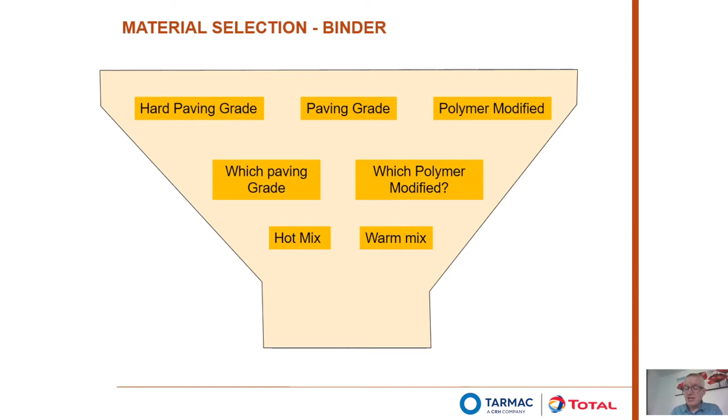Okay, now I want to focus very much on polymer modified bitumens because I see there's going to be an increasing use of polymer modified bitumen because of the real benefits that they can offer in terms of resistance to road stresses and the contribution it can make towards durability of the asphalt surface.

We can look at the impact in terms of the polymer modified bitumens and how stiff they are. Okay, whether they're very hard bitumens, i.e., very stiff, or whether they're very soft bitumens, i.e. they have low stiffness, but also in terms of the polymer impact, whether it's low polymer impact or high polymer impact. Now on this graph, I resisted putting low polymer concentration and high polymer concentration because it's never as straightforward as that.

Because it depends very much upon the bitumen source that you're using as to how influential that polymer content is going to be. It depends upon the type of polymer you use. It depends upon whether or not you cross-link those polymers. So rather than saying polymer content, I've talked about polymer impact because it is so dependent upon many different factors.

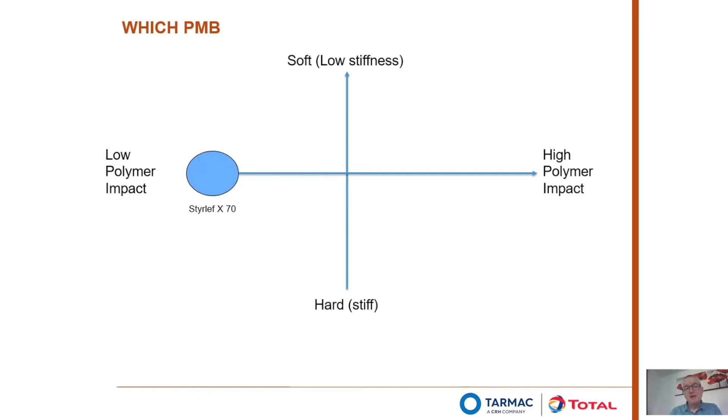So if we think about the behavior of the polymer modified bitumens in terms of these criteria, the Styrelf range that we manufacture at Total, we can put on this chart where the different grades are. So our Styrelf X70, which is effectively our basic grade of polymer modified bitumens, they're going to lie at the lower polymer impact. So these are a slight improvement on penetration grade materials. Being a 70 pen, it's sort of an average penetration.

We can then move to something like a Styrelf eXcel 50, which is a mid-range polymer. So we've moved further along the polymer impact scale because we're getting much more benefits coming from that polymer impact. And what that means is that we're going to see better resistance to a lot of the stresses that the road's subjected to. But again, we need to understand the specific stresses we're talking about. We're going to look at that in a little bit.

And finally, the top of the range material is something like the Styrelf eXtreme 100, which, as you can see, is right towards the high polymer impact end, but right at the top of the low stiffness, because it's a very soft bitumen.

The reason I believe we should be looking for these softer materials is that yes, it has to resist the stresses sufficiently, but bitumens are only going to get harder with age. So for me, if we can select the softest material possible, it allows us to have that bitumen on site longer before it reaches the critical stiffness at which it starts cracking.

So you can see where we're lying there with the types of products we manufacture within Total. What I want to look at now is some of the stresses that are going to be applied to the asphalt and how these bitumens will contribute towards resisting those stresses.

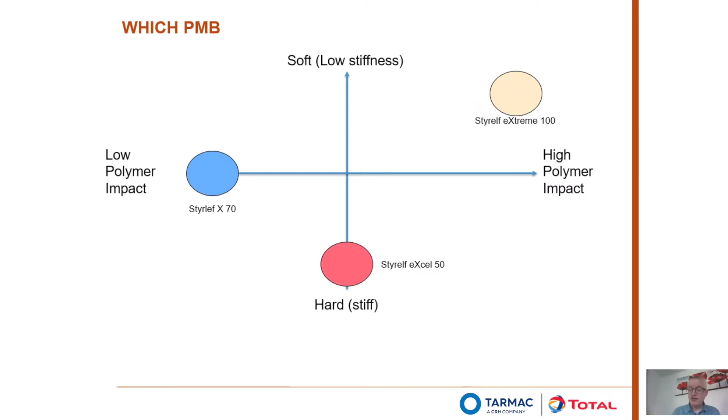Let's have a look first of all at dynamic deformation. You're going to see improvements in performance if you go along the high polymer impact route, or if you go down towards the stiffer materials.

When we're talking about dynamic deformation, we're talking about the impact of the traffic moving over the road. The road itself is a flexible material, so it's going to give, but we always get left with a partial, very small amount of microscopic permanent deformation. The stiffer the material is, the less it moves in the first place, so the less permanent deformation you have.

So if you want to resist dynamic deformation, you can go with very stiff materials, but also you can go with higher polymer impact, because that means the road becomes more elastic, so it recovers more. With something like Styrelf eXtreme 100, right at the far end of the polymer impact scale, where we've got a high polymer impact, we're getting really good recovery.

So that means that even though it's quite a soft material, the amount of permanent deformation is restricted. You wouldn't choose something where you have concerns about dynamic deformation. I wouldn't be using something like a Styrelf X70, because it hasn't got the contribution from the polymer that it needs to resist that dynamic deformation.

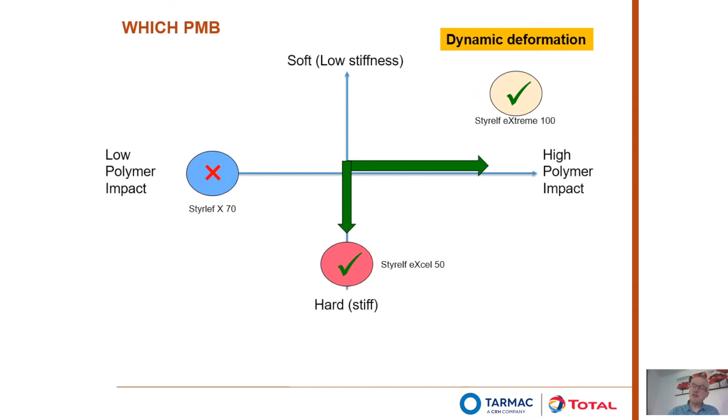And then, of course, if you look at the Styrelf eXtreme 100, it's not stiff at all. It's very low stiffness, but it has such a high impact from the polymer that it can resist, because of the amount of recovery that it's going to give. Let's look at that in a bit more detail.

We can talk about this MSCRT test, which is one of the European test methods, where you're effectively sticking together two plates with a little bit of bitumen, and with the top plate you're applying a 1 second predetermined stress to it, and that results in the lower plate moving as the bitumen strains. The stress is removed for 9 seconds, allowing a little bit of recovery, and then it's repeated a further 9 times, so a total of 10 actions.

What we're measuring is the amount of recovery we get back from that stress that's been applied, averaged over those 10 periods. We also want to look at the effective amount of permanent deformation we're getting.

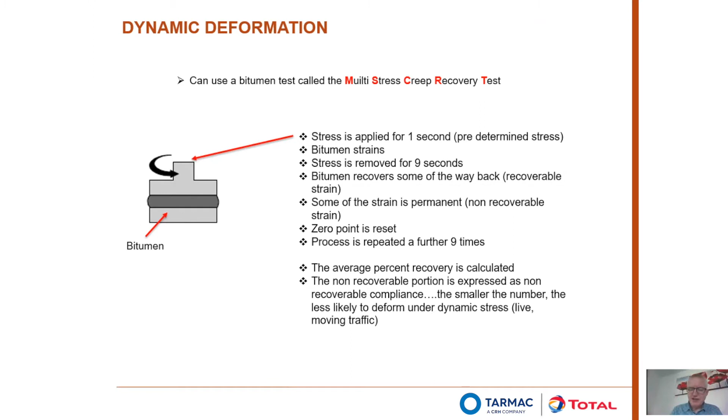When we translate that graphically, I've sort of inverted the whole impact here, so we're looking at the propensity towards dynamic deformation. The further down these bar charts go, the more likely it is to be subjected to deformation. The different colour bar charts here are the different temperatures at which the test has been done.

If you look on the far left of the graph, we've got an Azalt 100/150 - a basic penetration grade bitumen at 125 pen. You can see the red colour, at 30 degrees, gives a degree of resistance to deformation. But as soon as you get the green bar, at 40 degrees C, it's giving up the ghost - so at 40 degrees C it's going to start deforming. As you move towards a slightly stiffer material, like an 85 pen, you get a bit better resistance, but still not great.

If you then move towards something like an eXcel 70 mid-range polymer, you can see that even at temperatures of 50 degrees C, we're still getting a little bit of resistance, but it's starting to go. Between 40 and 50 degrees C, you're starting to see a difference. And at 60 degrees C, it's definitely going.

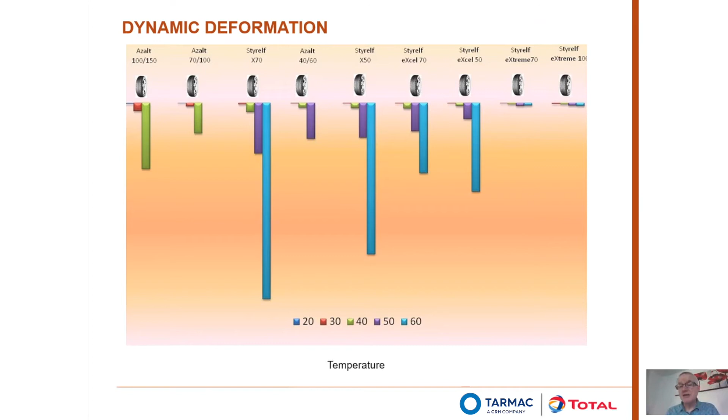But right at the extreme of the polymer impact, we have the Styrelf eXtreme 100. At 60 degrees C, even though it's a soft bitumen, the impact is fantastic because it's that elastic recovery which is stopping that permanent deformation from occurring. So whilst it's sort of contrary to what you might expect because it's low stiffness, it's very polymeric and very elastic, and that helps resist that dynamic deformation.

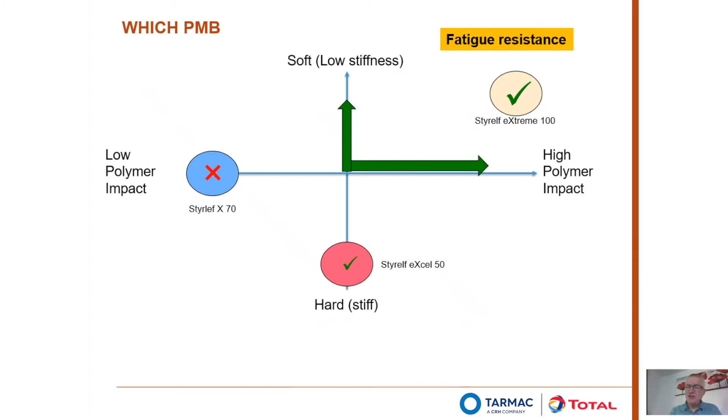If we now start thinking about fatigue resistance, we see a very different picture, because the fatigue resistance improves as we go softer in the bitumen, and again improves as we go up the polymer impact scale. So when thinking about fatigue resistance, you wouldn't necessarily choose a 40/60 bitumen. You might consider your Styrelf eXcel 50 because you've got that polymeric impact coming into play. But you'd certainly consider the Styrelf eXtreme 100 because it's not only low stiffness, but it has a huge amount of elastic recovery again.

So if we consider this test, again using the same equipment as the previous slide, where you stuck together a top plate and a bottom plate. But with this one, you're applying a known strain to it, moving it a certain distance. The bottom plate follows it, and you're measuring the amount of force required to move it. Effectively, what you're measuring is the G star, the complex modulus, but we can consider that as stiffness effectively. So the vertical axis here is measuring the complex modulus, or the stiffness of the material initially.

Because what happens is, as you repeat that strain - since this test is a repeated strain test - over several cycles, you start to develop microcracks and the complex modulus drops. We're measuring here the amount of stiffness that's retained in percent, so percent retained complex modulus after 30 minutes of repeated strain. Hopefully that'll make sense as we start to look at the graph.

So with a 5% strain, just a low level of strain being applied, you can see that the 40/60 bitumen is quite stiff, as you'd expect. Styrelf eXcel 70, because it's a softer bitumen, has a much lesser stiffness. The Styrelf eXtreme 100 lesser again. But what we do see is that after 30 minutes, we have almost 100% retained stiffness with the Extreme 100. So that's showing it's very elastomeric and resistant to strain - still, after 30 minutes, capable of relaxing the strain that's been applied to it. The Styrelf eXcel 70, possibly not quite as good, but still reasonably good. And the 40/60 pen, not particularly elastomeric at all, but it's still, after 30 minutes, retaining about 70% of that initial stiffness. So at 5%, very low levels of strain, we can see that picture.

If we then move to 10% strain, we see a very different picture appearing, because all of a sudden the 40/60 can't cope with that level of strain. It starts to crack quite readily, and you can see that after 30 minutes, you're left with only about 15% of the initial complex modulus. So it drops off rapidly. The eXcel 70, just over 50%, so it's better, but nowhere near as good as the Styrelf eXtreme 100.

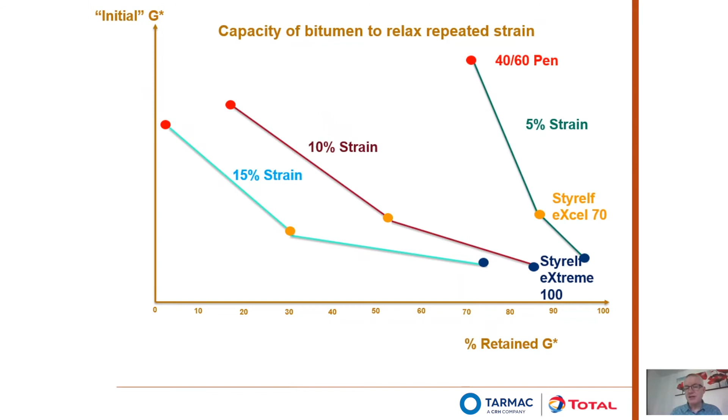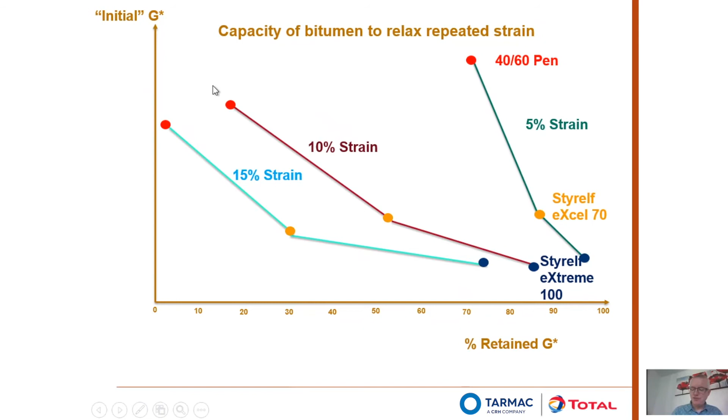If we move up to 15% strain, the differences are exaggerated even further. What that illustrates is that the capacity of Styrelf eXtreme 100, at the high end of the polymer impact, can cope with repeated strains. In other words, it's good in fatigue resistance, much more so even than the Styrelf eXcel 70, and definitely more so than the 40/60 pen. We can also consider fretting resistance, because fretting resistance is very important in terms of durability.

You don't want to be losing those surface aggregates from the surface of the asphalt.

So again, if we look at where the impacts are going to be improved, it's again towards that high polymer impact, and towards the lower stiffnesses. Because if the material's too stiff, and a fast force is applied to it, that bitumen is likely to fracture, and you'll lose your surface aggregates.

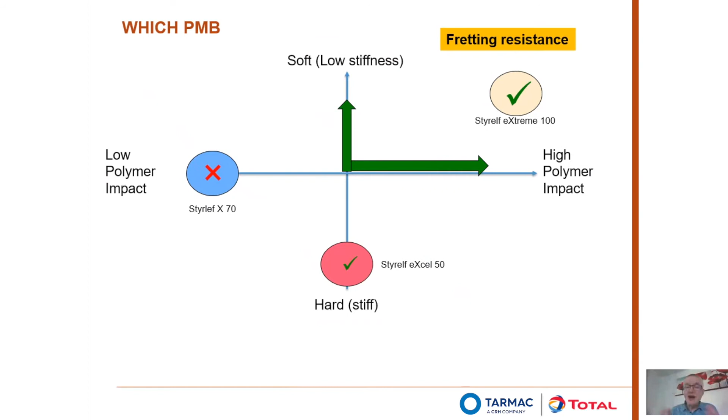So again, the Styrelf X70 is not going to be great at resisting fretting resistance. Your Styrelf eXcel 50 will contribute to it because it has a better polymer impact than the Styrelf X70, so it's a small tick in there. But of course, your Styrelf eXtreme 100, because of the high polymer impact, will have a big tick in there.

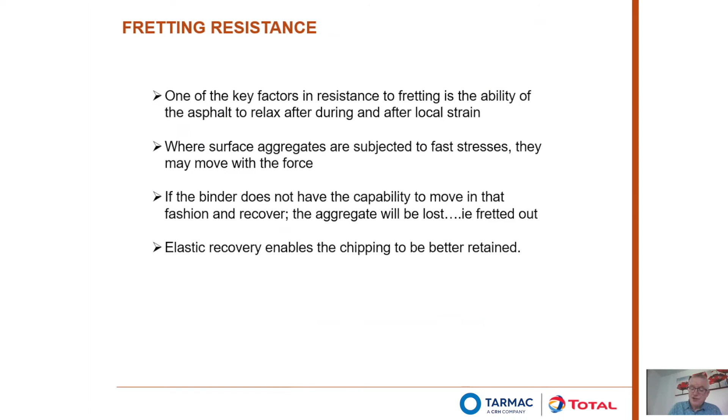And that's because one of the key factors in resisting fretting is the ability of the asphalt to relax after strain. It's very often where you get fast stresses impacting on the surface aggregates that you lose them - that's what fretting's all about. But if the binder can't move with the aggregate and recover, then the aggregate will be lost.

So elastic recovery is critically important in this area. If you look at a 40/60 pen, a normal penetration grade bitumen, you can see at 10 degrees C elastic recovery, 25 degrees C elastic recovery, and 60 degrees C elastic recovery, it's not great - not really contributing anything towards elastic recovery. So it's all about the capacity of the bitumen to hold itself, and once it goes past that point, it's going to fret out.

If you now consider the X70, you get significantly higher elastic recovery at 10 degrees, much more at 25 degrees, and a little bit more at 60 degrees C. So it's quite temperature susceptible. Move towards an eXcel 70, you've now got 65% recovery down at 10 degrees, 80% at 25, and 60% at 60 degrees C. So we're starting to improve that elastic recovery all through the temperature range.

And of course, Styrelf eXtreme 100 has a phenomenal amount of recovery, even down to 10 degrees and up to 60 degrees C. That's why that type of binder is so good at resisting fretting from surface stresses.

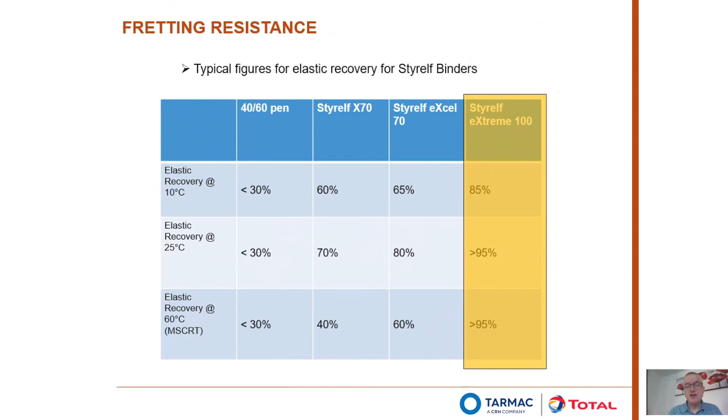We now consider resistance to ambient temperature variations. I think this is an area we have to consider more with climate change - they keep talking about the potential for extreme weather conditions, so resistance to ambient temperature variations is becoming increasingly important. Again, one of the key factors is the amount of polymeric impact we can see. So again, X70 is not really going to have much impact. Styrelf eXcel 50 will have a little bit of impact, being an intermediate grade polymer, but the best of all will be Styrelf eXtreme 100.

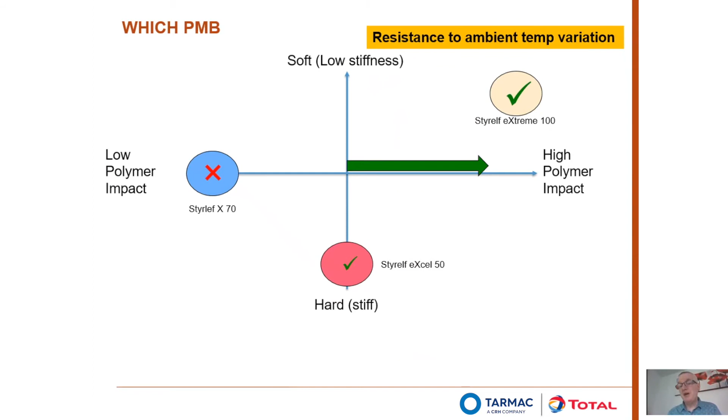And if we look at that - because bitumen is a strange material, it behaves in a way very different to how our brains operate, because we tend to think of things as pure solids and pure liquids. Water, for example - you get home of an evening for your gin and tonic, you get your ice out of the fridge and it's absolutely solid, but as soon as it reaches 0 degrees C, it turns to a pure liquid. Bitumen's not like that. Bitumen shows both solid and liquid characteristics at the same time.

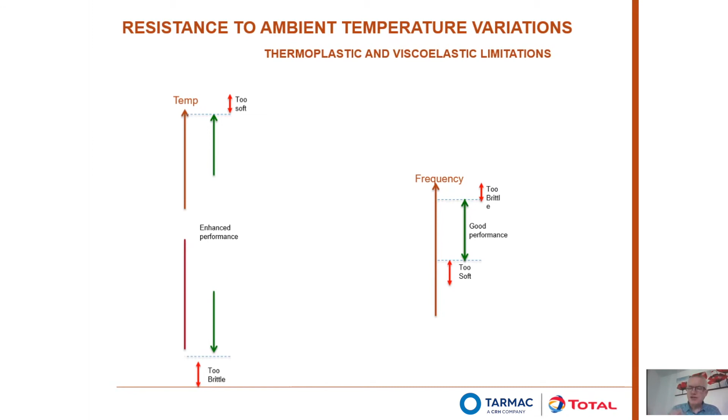The contribution of the polymer means we can stretch the frequency of force at which it becomes too brittle. The reality is it doesn't do an awful lot to the bottom frequency force. With static forces, static creep, the polymer doesn't have time to recover, because elastomeric polymer impact is all about giving and then recovering. But if that force is constant in a creep-type situation, the polymeric impact doesn't have time to recover, so it does keep going.

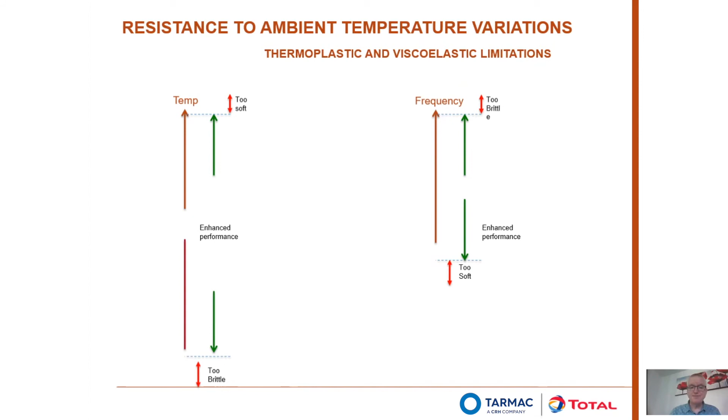So with the frequency of force, it's very important at the high end, the high frequency forces. What that translates to in terms of temperature is performance. You can see with Styrelf eXtreme, over a much wider temperature range, somewhere between about 80 down to -20, -25 degrees C, compared with a 40/60 that's probably around -12 up to about 50 degrees C.

So this is the impact. The mid-range one you can see around about +60-ish down to about -20. So again, mid-range polymers are starting to give significant improvement, but the extreme, the high polymeric impact gives really good protection against ranges of temperature.

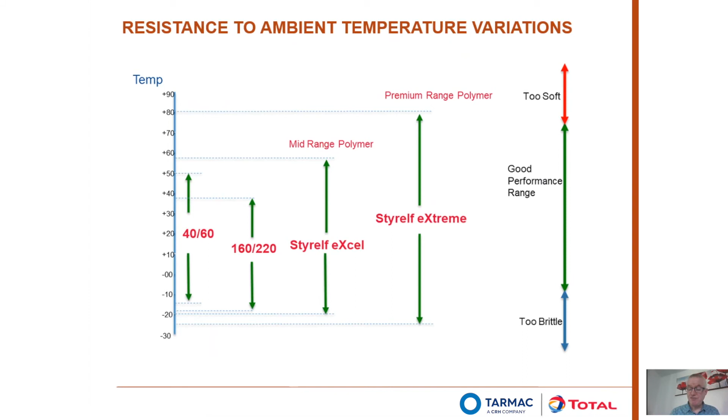So if we return to that thought about static creep resistance and look at the type of bitumen you want to use in your asphalt in that situation, that is all about bitumen stiffness. As I said before, the polymer won't help it much if it's an elastomeric polymer, because it's not getting time to recover—that's how elastomeric polymers act.

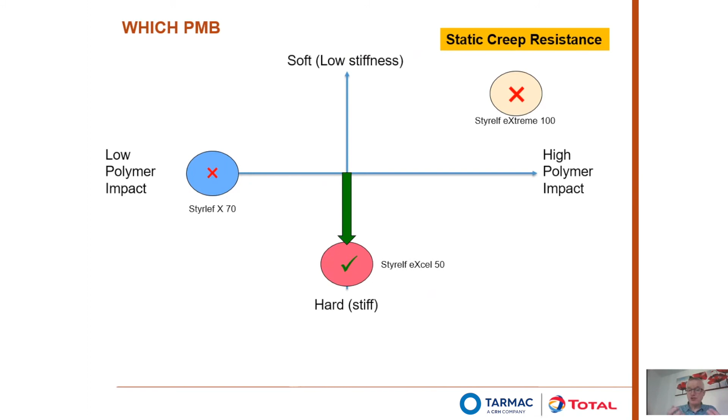So something like X70 is a little bit too soft. Something like eXcel 50, because it's a harder, stiffer bitumen, that's going to work reasonably. Styrelf eXtreme 100 this time won't work because it's soft—it's low stiffness. Static creep resistance is all about stiffness, so the stiffer you go with your bitumen, the better the performance.

So we've looked at a few different areas of performance, and I think we can summarize that on a radar graph. You can see this is the bitumen contribution towards asphalt performance in all different manners—the holistic performance, if you like, of the asphalt.

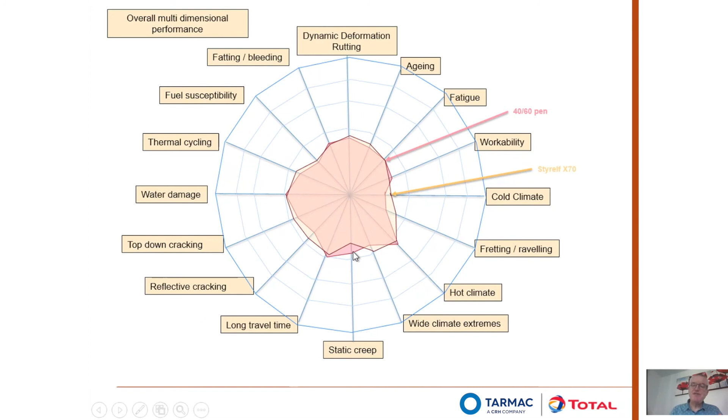If we then compare the 40/60 pen against an X70 bitumen, you can see you're starting to get slight improvement in terms of resistance to fretting and raveling, for example, around this area—an improvement in performance there, and a slight improvement in areas of reflective cracking. But static creep, because 50 pen is stiffer than an X70, it's a worse performance.

If now we start to look at an intermediate grade polymer, something like an eXcel 70, then you start to see more significant improvements in terms of reflective cracking, because you've got that elastomeric impact starting to help. We're seeing the same for the same reasons in terms of thermal cycling, and improvements in terms of dynamic deformation, because again you've got this elastomeric impact starting to contribute significantly.

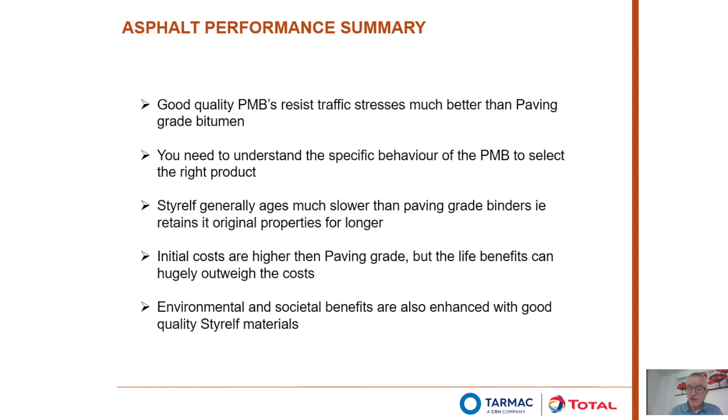Asphalt durability is impacted in many areas. One of the key areas is in material selection, so it's critically important not to be blasé about that, but to think about it seriously and really understand it. We know that cross-linked polymer systems can have a significant beneficial impact on it.

And we talked about warm mix, and we've got to ask the question, why wouldn't you use warm mix? It must be the future norm. We must start thinking about value engineering—we must focus on durability and life costs, not just initial costs. So the message from me in this: please consider sustainability through durability, because I think that is the way forward. Thank you very much.